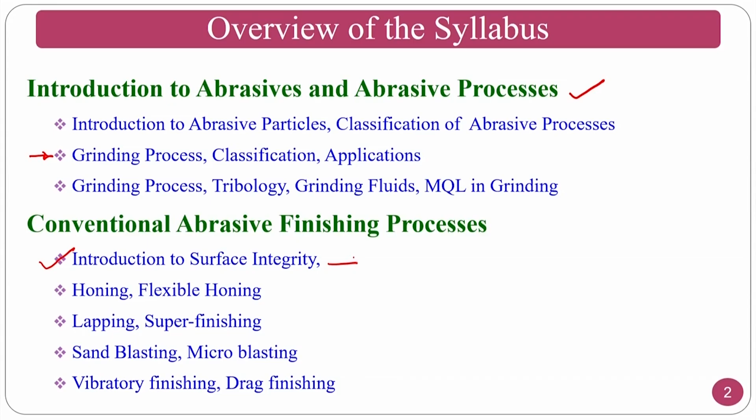So conventional finishing processes, and we also saw the introduction to surface integrity, because these abrasive finishing processes are mainly for generation of good surfaces. Surface integrity stands for surface morphology and surface metallurgy. So these two things we have seen in the grinding process.

Then we went to the honing process, and another variant of this honing process is the flexible honing process, where you have spheres attached to a wire, and how flexibility can be incorporated in a honing stick, that we have seen.

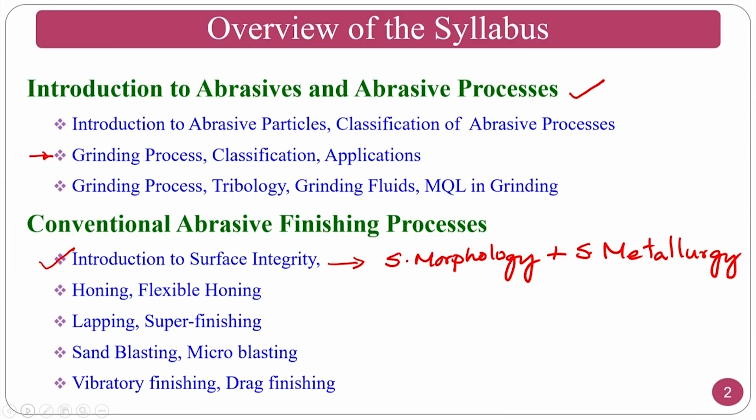Then we moved on to lapping process and super finishing, sandblasting and microblasting, vibratory finishing, and drag finishing. What are the drawbacks of vibratory finishing? The components on the periphery of the bowl will have more motion rather than the components at the center. To avoid that, there is a drag finishing process, where you hold the component and the medium is rotated, so that all components at respective locations get similar surface finish.

Then we moved on to advanced abrasive machining processes, where we saw abrasive jet machining process, using abrasives plus air, and abrasive water jet machining, using water plus abrasives. Then ultrasonic machining process, where ultrasonic motion is given to the tool so that it hits the abrasive particle in contact with the tool, transforming kinetic energy that goes and hits the workpiece, and similarly the material is removed.

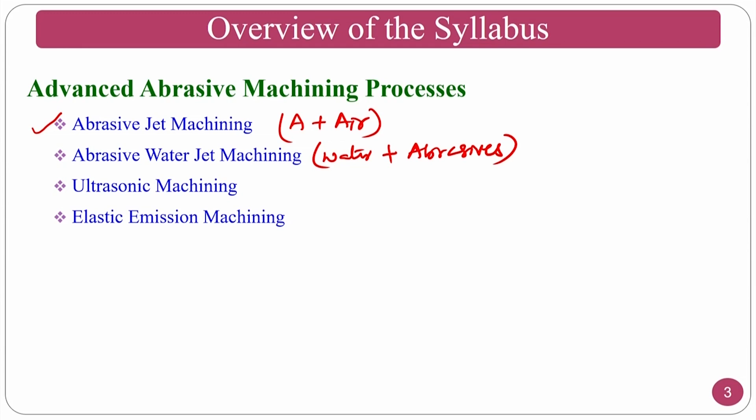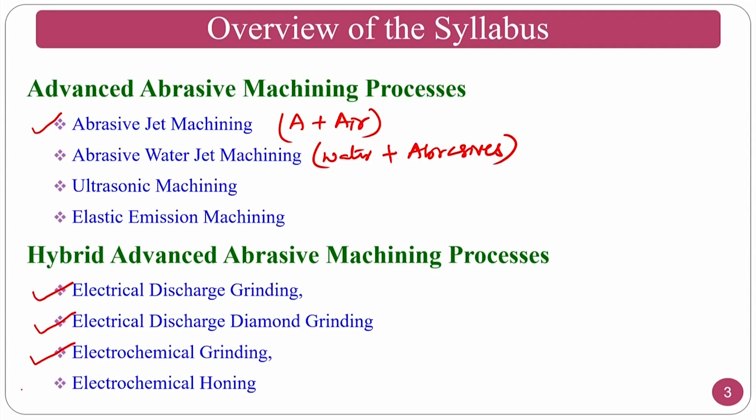Then we saw the elastic emission machining process. Then we moved on to hybrid advanced abrasive machining processes, wherein we saw electric discharge grinding, electric discharge diamond grinding, electrochemical grinding, electrochemical honing, and other processes.

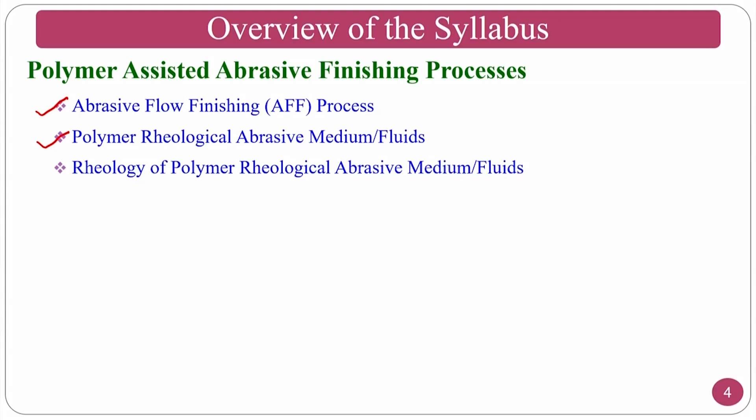Then we moved on to polymer assisted abrasive finishing processes, and we saw abrasive flow finishing process, polymer rheological abrasive medium and fluid composition, which is a complex part of this process. Then we covered the rheology of polymer rheological abrasive fluids or medium, and finally what we studied is magnetic field assisted abrasive machining and finishing processes, mostly called finishing processes.

So the first one we have studied is magnetic abrasive finishing process, followed by the magnetic deburring process. At the same time, there are some studies about vibration assisted MAF, which I have not taught in this syllabus because of time constraints, but giving vibrations to this process will improve the material removal rate.

In magnetic abrasive deburring, the chips adhered to the workpiece can be removed. Magnetorheological finishing process and chemomechanical MRF is studied, where CMP, chemomechanical polishing, is combined with magnetorheological finishing process, and we came up with a hybrid version called chemomechanical MRF process.

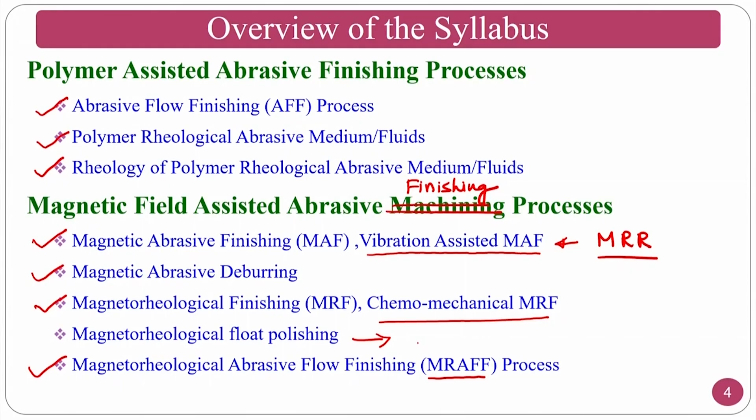In the second go, what we have done is magnetorheological finishing process is clubbed along with the abrasive flow finishing process, and we named it magnetorheological abrasive flow finishing process. We also studied magnetorheological float polishing techniques, where you can do finishing of spherical particles or spherical shapes, but not very big spheres, only small ones made of ceramics and other materials.

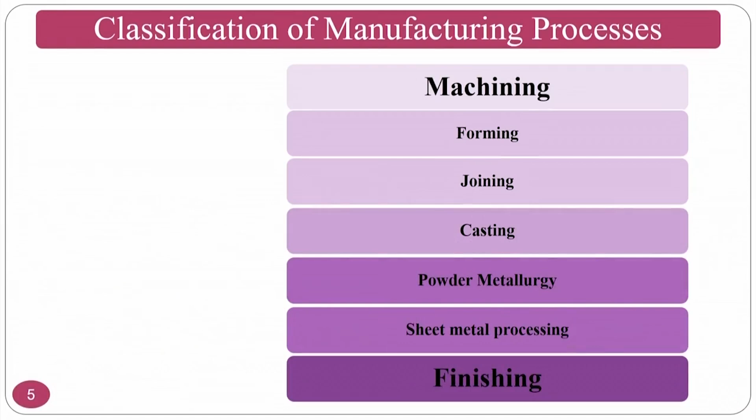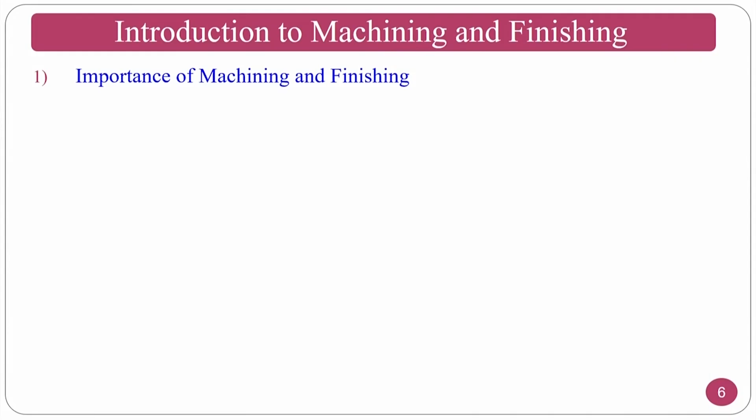So as we have seen, these abrasive processes mostly come in the machining region as well as the finishing region. We covered introduction to machining and finishing, their importance, basic principles, manufacturing and other things, why machining is important in manufacturing, and why finishing is important in manufacturing.

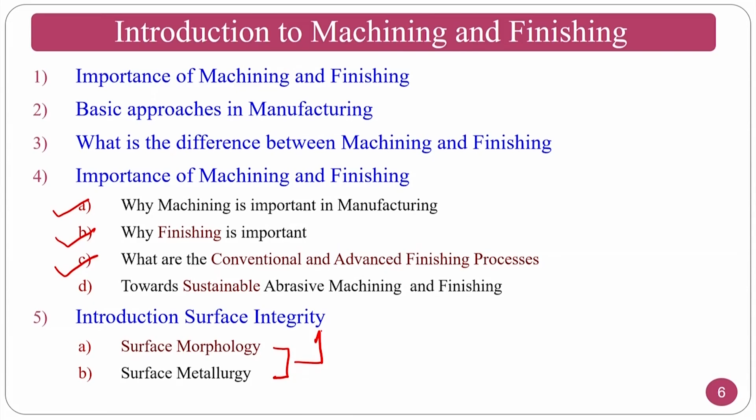Conventional and advanced finishing processes, what comes under this umbrella, we have seen, and introduction to surface integrity, which deals with surface morphology and surface metallurgy. These two combined are called surface integrity. This we have seen, and why we have to study abrasive machining and finishing processes, you have to understand.

Finishing is one of the final processes on a particular component. If you see here, this is a welding region, and if you are going to sell your product, assume this is a gas pipeline or petrol pipeline. Chemical reactions will take place at the metallurgical change locations. So you have to do the polishing operation so that you can achieve a smooth finish from this to this.

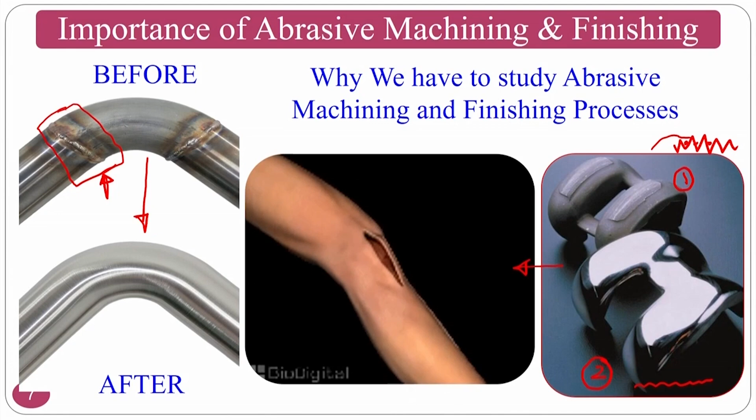At the same time, finishing of knee implants and hip implants is most important. If you see here, if you put implant 1 and implant 2, implant 1 will have a very rough surface, and your body fluids flowing on it will stagnate there, causing rusting. If you have a smooth surface like this instead, the flexibility of your knee will be good, and your body fluids don't have much space to stay, so rusting decreases enormously and the life of the component goes up.

That is the beauty about the advanced finishing processes. That's why you need to study this course in detail, and this is the beauty about finishing using conventional finishing techniques and advanced finishing techniques that use abrasive particles.

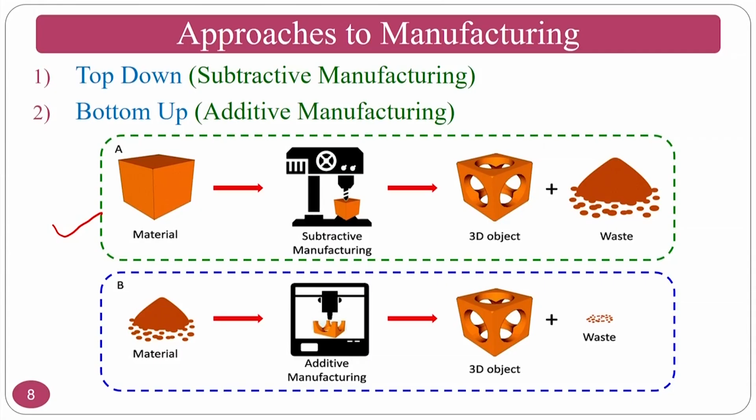In manufacturing, we have two approaches, and the approach our process belongs to is the top-down approach, which is nothing but the subtractive manufacturing process, while people nowadays are also following additive manufacturing. Our abrasive machining and finishing processes come under the umbrella of subtractive machining or subtractive manufacturing processes.

And you should know what is the difference between machining and finishing. If you were not there in my first lecture, these slides will be much useful to you. If you have seen it already, then you can revise what you saw in the first class.

In a machining process, you are mostly worried about how much material is removed. The major criteria is material removal or material removal rate. We check how much material is removed, like whether the diameter changed from 100 mm to 80 mm or not. In finishing, my criteria is what is the final surface roughness achieved, whether I achieved a nano surface finish or a micro surface finish. That is most important in finishing. In machining, you worry about material removal; in finishing, you don't worry about material removal, but about the final surface roughness.

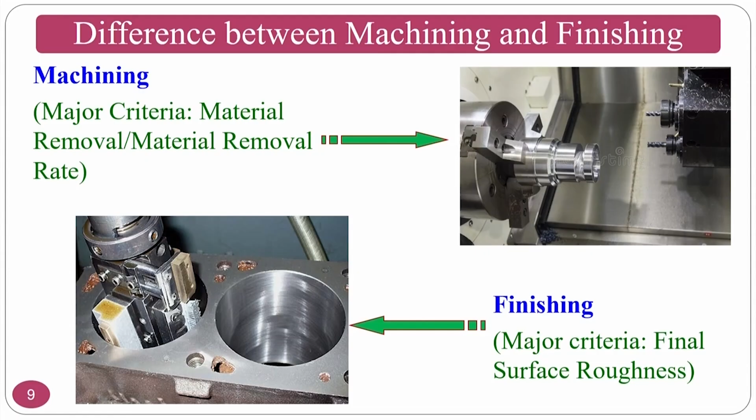Grinding comes under the top-down approach. The machining or finishing starts after the fracture. In metal forming, processes will follow in this region, and metal cutting and finishing processes will follow after the fracture. Because the material is sheared out from the parent material, as per metal forming, fracture is already done, because material removal processes like grinding, honing, or conventional and unconventional abrasive processes involve material being detached or sheared out from the parent material, meaning severe plastic deformation and fracture are taking place. So where metal forming stops is the starting point for metal cutting, machining, or finishing processes.

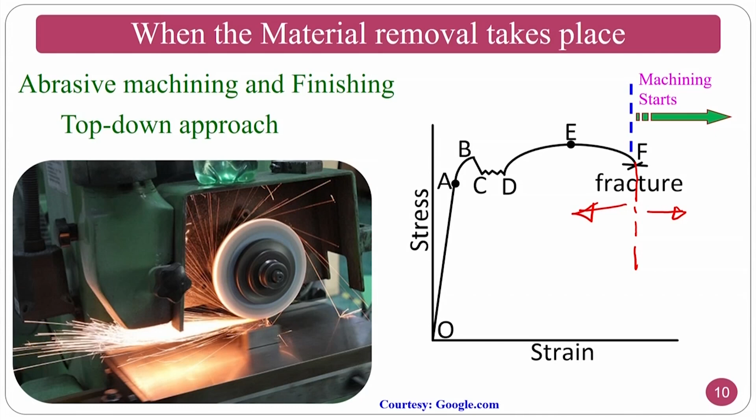So we will review what we have studied in detail. We have seen the abrasive particles, their sizes, and how to convert the size of abrasive particles from the mesh size, and we have also seen bonded abrasives. What do you mean by coated abrasives? In some cases, the abrasives are brazed to the grinding wheel or to a wire, and then on top of it they give a coating as well.

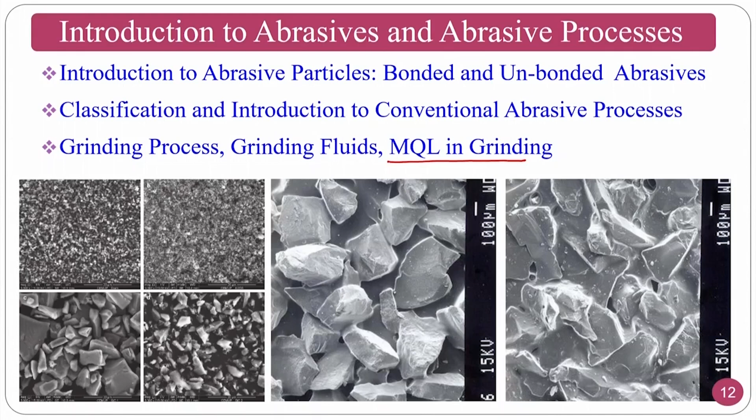At the same time, a good thing we studied is how to protect our staff. Even as an engineer in a company, for that purpose you have to find sustainable solutions, wherein we introduced grinding fluids which are biocompatible enough, which prevent environmental pollution to the maximum extent, and which reduce the problems faced by operators. This means the system and surroundings will be maintained environmentally good, or you can say eco-friendly.

For that purpose, we have studied two things. One is minimum quantity lubrication in the grinding process. I am very thankful for the help given by Professor L. Vijayaraghavan of IIT Madras. And the second thing we studied is biodegradable or eco-friendly cutting fluid development.

I am very thankful for this particular part to my research group, where we developed our own fluid in collaboration with IISc Bangalore, and how the BOD, COD and other parameters are to be taken care of before dumping into nearby water bodies, so that the ecosystem can be maintained. These are all things we have studied.

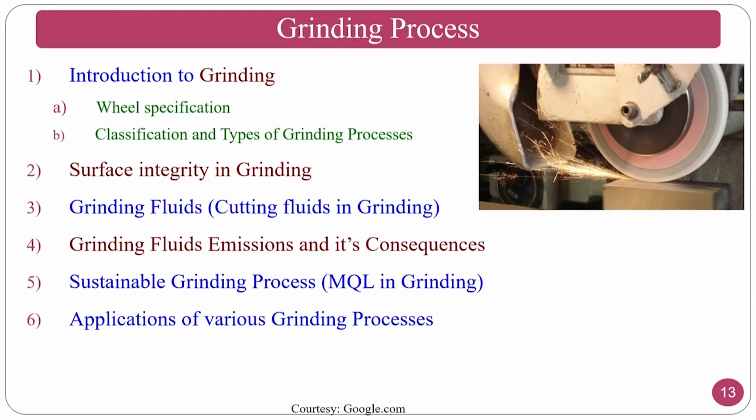Then we move on to surface integrity in grinding and wheel specification. In wheel specification, we have seen the type of abrasive particles, size of abrasive particles, grade, meaning how the abrasive particle is held by the bonding material, and structure, whether it is an open structure or a closed structure. In open structure, the abrasives are placed apart. In closed structure, the abrasive particle density is more. And lastly, what is the bonding material, whether it is clay, vitrified bond, rubber bond, metallic bond, or what type of bonds you can use, and their applications in various sectors.

Vitrified bond has its own applications, metallic bond has its own applications. We have seen electric discharge grinding, electric discharge diamond grinding, electrochemical grinding, and all these processes use metallic bonding.

Another process we have seen is the belt grinding process, where we saw how knee implants are fabricated, polished, or finished. In belt grinding, people can use a robotic arm with different motions, and you can rotate or give some feed as per the requirement, so that the moving belt can finish the implant materials.

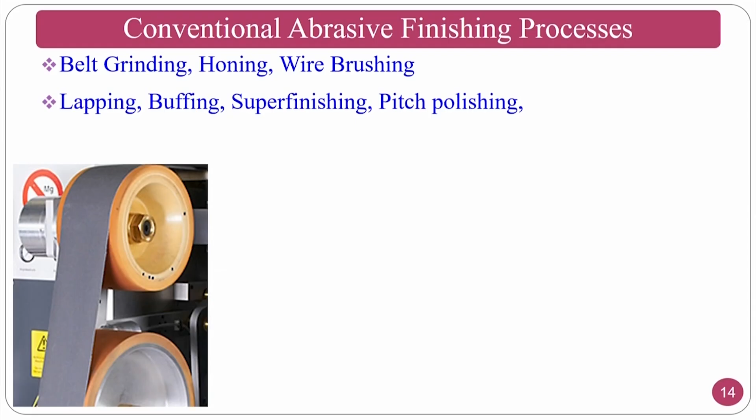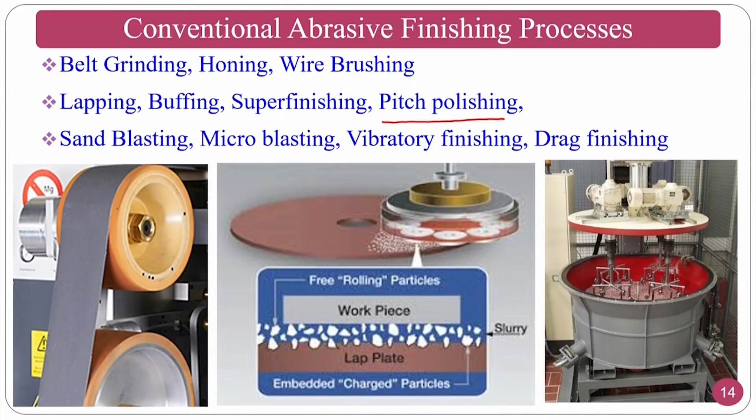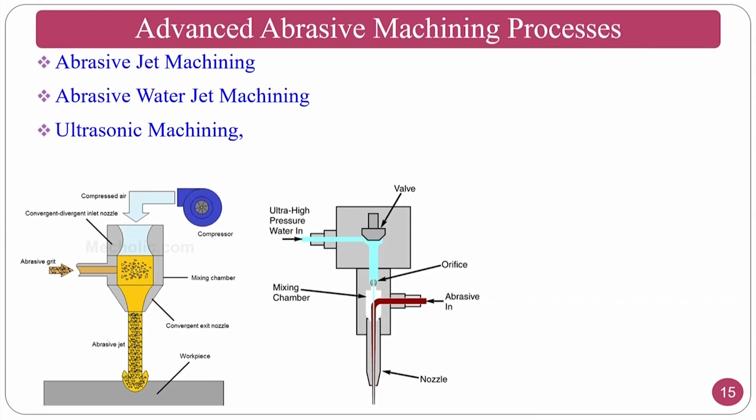We covered lapping, buffing, super finishing, and also the good process called pitch polishing for lens manufacturing and other applications, as well as sandblasting, microblasting, vibratory finishing, and drag finishing operations. In advanced abrasive machining processes, we have seen abrasive jet machining, abrasive water jet machining, ultrasonic machining, and elastic emission machining.

As said in the previous slide, in abrasive jet machining we take the assistance of air to give velocity to the abrasive particle, whereas in abrasive water jet machining we take assistance from water to give kinetic energy to the abrasive particle and hit the workpiece. The beauty of abrasive water jet machining compared to abrasive jet machining is that confinement of the jet is much better, because in air, divergence is one of the problems.

Then we move to the ultrasonic machining process, where you feed abrasive slurry between the workpiece and the tool, and ultrasonic motions are given to the tool. The tool hits the abrasive particle in contact with it, then the abrasive particle gains kinetic energy and hits the workpiece. The kinetic energy imparts fracture if it is a brittle material, and these fragments are carried away by the abrasive slurry.

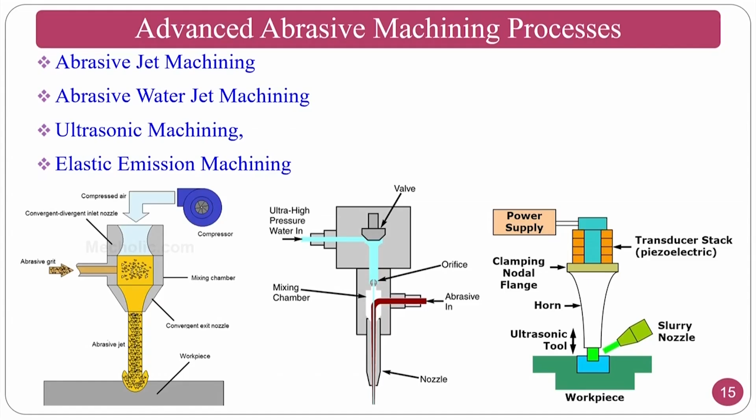In elastic emission machining, we have seen that a spherical polymer ball, abrasives, and the carrier medium will be there. You can put some pressure, but there will not be any physical contact between the ball, which is made of polymer, and the surface. Instead, there will be a chemical interaction between the atoms of the workpiece and the fluid, so that atom-by-atom material removal takes place, giving a very good super finishing in this process.

In hybrid advanced abrasive machining processes, we have seen electric discharge grinding, wherein there will be a metallic wheel with a dielectric fluid that you can rotate, and the material removal in electric discharge grinding is purely by the spark. Do you know how EDM works?

EDM works whenever you have a negative terminal and a positive terminal. The negative terminal releases electrons, which hit the dielectric molecules. These dielectric molecules again generate electrons, because the dielectric fluid is normally deionized water, meaning the ions are mostly removed so electrons dominate. So one molecule of dielectric hit by an electron from the negative terminal will generate a lot of electrons, which are very small in size. These electrons proceed toward the positive terminal, hitting more dielectric molecules along the way and generating millions of electrons, which then go and hit the workpiece.

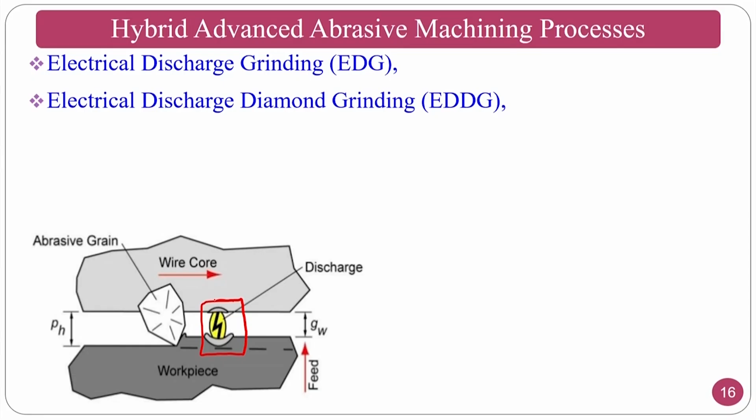We have also seen the electric discharge diamond grinding process, wherein diamond particles are brazed on a metallic wheel. Here, a spark causes the workpiece to become thermally softened, and then the diamond particle removes the material.

In Wire EDG, we have also seen diamond particles brazed on a wire, similar to wire EDM. A similar mechanism applies here, like electric discharge diamond grinding: on the wire where the bare material is present, the spark is generated and the diamond particles remove the material.

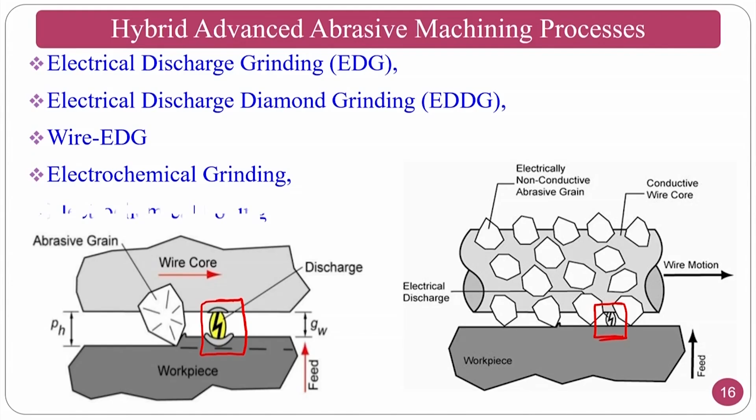Then we move on to the electrochemical grinding process, and we have also seen the electrochemical honing process. Then we move on to polymer assisted abrasive finishing processes, where we studied abrasive flow finishing, the polymer rheological abrasive medium and its rheology, and the types of abrasive flow finishing processes and their applications.

Complex surface finishing can be done only by the abrasive finishing process, using polymer rheological abrasive medium, because here you do not require any external source like a magnetic field. For example, if you have a knee implant, it is very difficult for a magnetorheological finishing process to finish it.

If at all we want to finish it with magnetorheological finishing, the basic problem is that the finishing time will be very high, because the electromagnet distance is constant, and because of this the field strength will vary for the continuous curvature of the knee implant.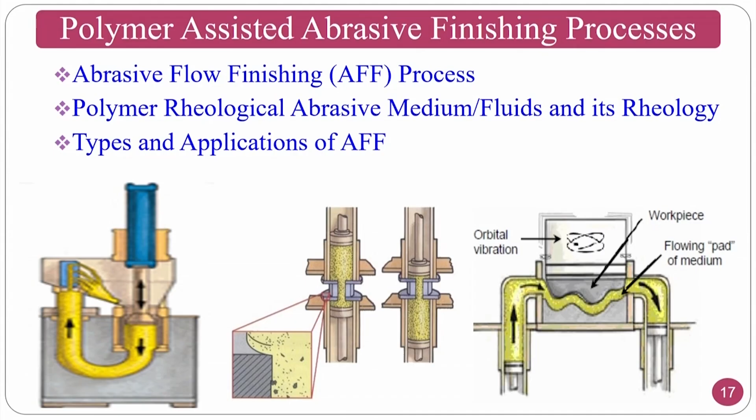But in the case of polymer rheological abrasive fluids, the fluid itself can do the job because of its viscoelastic nature. The viscous component tries to move axially along the direction of the extrusion pressure, while the radial force is provided by the elastic component. So there will not be any external source needed. That is why you can finish any type of complex surface using this abrasive flow finishing process, especially using polymer rheological abrasive fluids.

Then we move on to the magnetic field assisted abrasive finishing processes, wherein we started with the magnetic abrasive finishing process, then the magnetic abrasive deburring process, and the magnetic float polishing process. In magnetic abrasive finishing, you can work on flat surfaces as well as cylindrical surfaces, both internal and external, and we also move on to the deburring operation using magnetic abrasive finishing process.

That is why this process is called magnetic abrasive deburring process, and the burrs that are generated during the drilling and micro drilling process can be removed by this magnetic abrasive deburring process.

Then we move on to magnetic float polishing process, where you can finish ceramic spheres using this particular process.

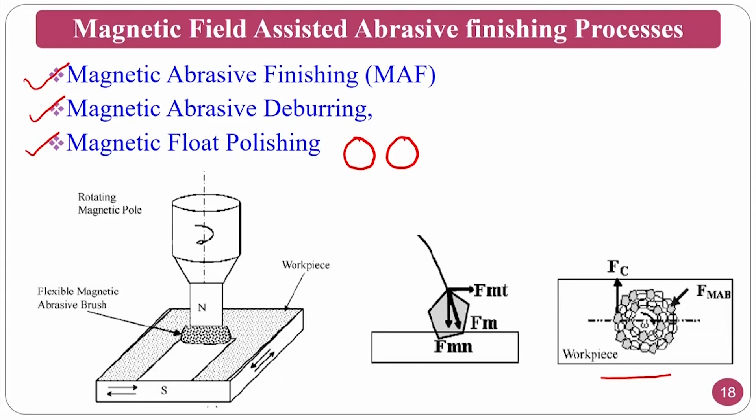In the pulsating type, the beauty is that you will get a pulse and a gap. Whenever there is a gap, this flexible magnetic abrasive brush will collapse instantaneously for a momentary time, and then again it will form magnetic chains, because of which new cutting edges will come into existence.

At the same time, new abrasive particles also come into existence because you are forming a new chain. That is why finishing efficiency is much better compared to the static flexible magnetic abrasive brush. In pulsating flexible magnetic abrasive finishing, the surface finish achieved is much better, and material removal is also better compared to the static brush.

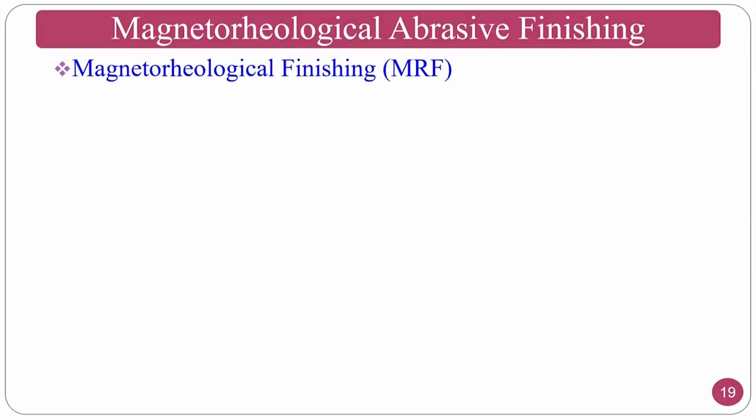Then we moved to magnetorheological abrasive finishing process, where it is used for finishing contact lenses or many types of lenses. This can be blended with chemomechanical magnetorheological finishing process, so that chemical action as well as magnetorheological action come into place and perform the polishing operation at nanometer or sub-nanometer level.

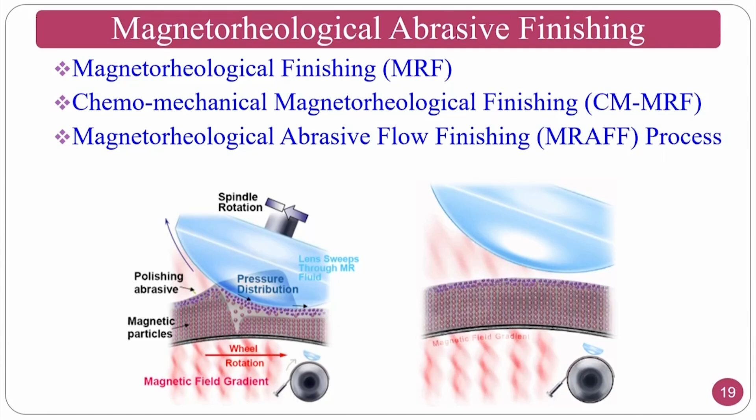Later we have seen that magnetorheological finishing process can be blended with abrasive flow finishing process. In abrasive flow finishing process, the forces cannot be controlled because there is no controlling unit like a magnetic field.

But magnetorheological fluids have CIP particles, that is pure iron particles. Whenever you apply a magnetic field, these chains form and you can control the viscosity by the external magnetic field. That is why the fluid of MRF process and the machine structure of abrasive flow finishing process are clubbed together to come up with a good solution, called magnetorheological abrasive flow finishing process.

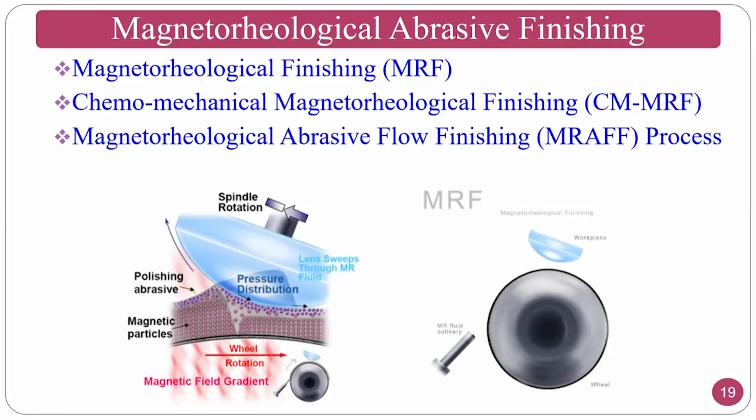However, in order to improve the magnetic field distribution for cylindrical workpieces and some other workpieces, rotational magnetorheological abrasive flow finishing also came into existence, and the distribution will be uniform and the surface finish generated on cylindrical tubes will be good.

But what we have to notice between polymer rheological fluids and magnetorheological fluids is that controlling ability is good in magnetorheological finishing fluids, but you cannot finish much complex surfaces with them because electromagnets are kept at a certain distance. If the curvature changes from point to point, the magnetic field intensity will go down as the distance increases, because of which the finishing rate or surface finish achieved will differ from location to location.

The list of reference books and materials specified for this course includes Principles of Abrasive Processing. This is a very good book for conventional finishing processes like grinding, lapping, honing, and almost all the abrasive processes.

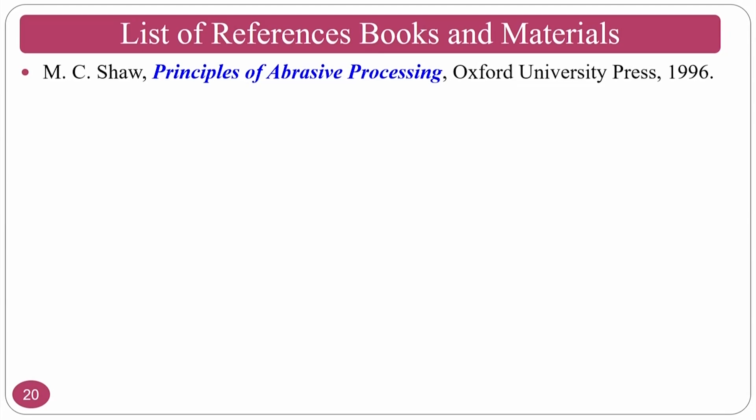You can also follow Professor V.K. Jain's Micromanufacturing Processes. At the same time, Professor V.K. Jain's another book is Nano Finishing Science and Technology, published by CRC Press. This also gives insights into magnetic field assisted finishing processes as well as polymer rheological abrasive fluid based finishing processes.

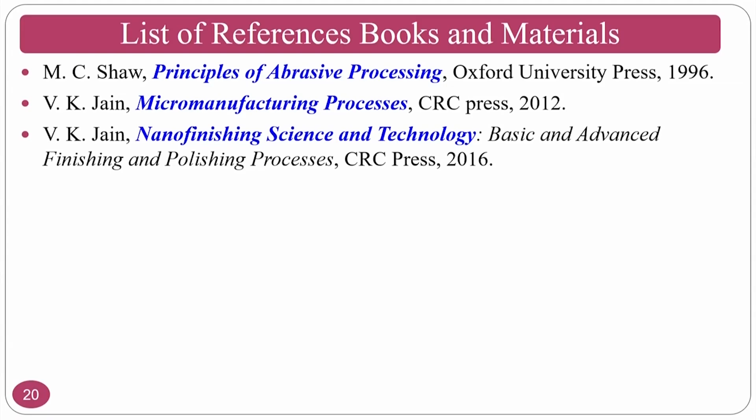Another book is Advanced Methods of Machining by Professor Joseph McGeough, and if you want to understand the grinding process in depth, you can follow Professor G.K. Lal's book Introduction to Machining Science.

Normally, this process will have single point cutting tool and multi-point cutting tool. This book by Professor G.K. Lal covers single point cutting tool, multi-point cutting tool, and abrasive processes. Specifically for this course, you can go through the abrasive processes, majorly covering conventional abrasive finishing processes.

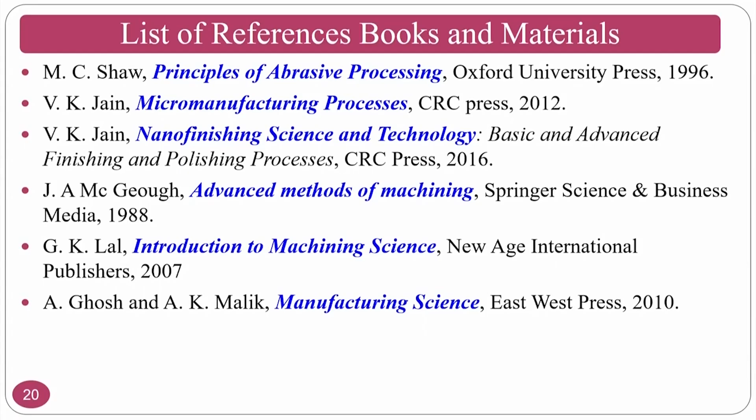Professor Amitabh Ghosh and Professor Ashok Kumar Malik have also written a manufacturing book where you can see the grinding process, particularly about this course and other conventional machining processes. Also, Astakhov's Metalworking Fluids is one of the good books that gives insights into what cutting fluids are used for, the positives from a mechanical point of view, and the negatives from an environmental point of view.

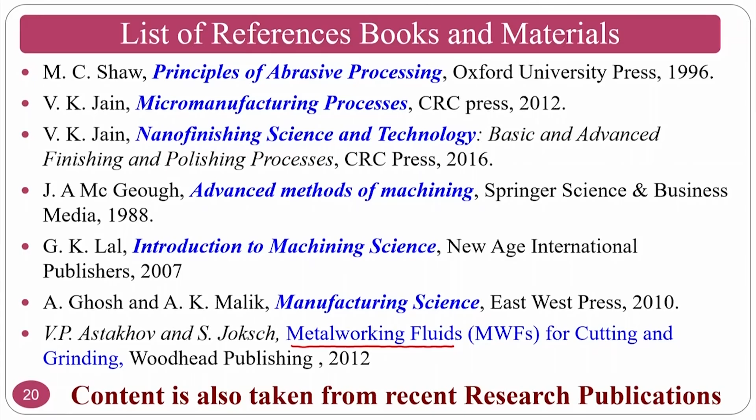These slides are mostly taken from research papers as well. So this course is a blend of research publications, research books and common textbooks, giving you a blend of knowledge about abrasive machining and abrasive finishing processes. This course is an introductory course, so I am not covering mathematics or mechanics beyond the basics. It is meant to help you understand how the process looks, how it works, its applications, capabilities, and advantages.